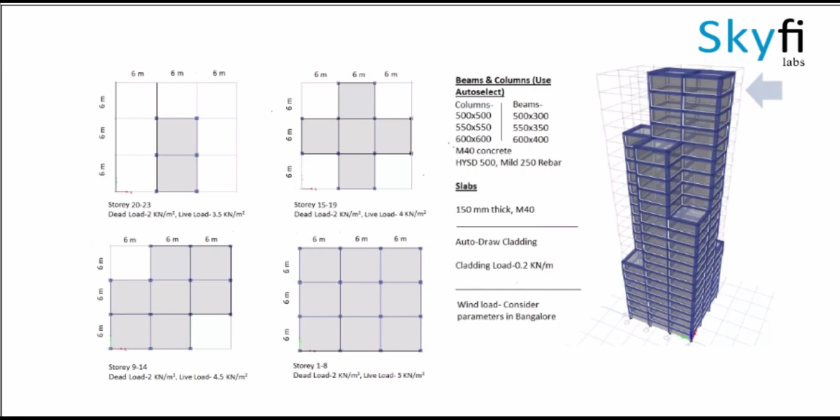By looking at this figure we can see the various beams and columns that have been given, and we have to use the auto select option for both beams and columns of various sections considering M40 concrete, HYSD 500, and mild 250 rebar. The slab is 150 thick, and the various sections and grid lines as shown in the figure have to be constructed.

Now go to Define and add materials, and define the materials M40, mild steel 250, and HYSD 500 by adding new materials.

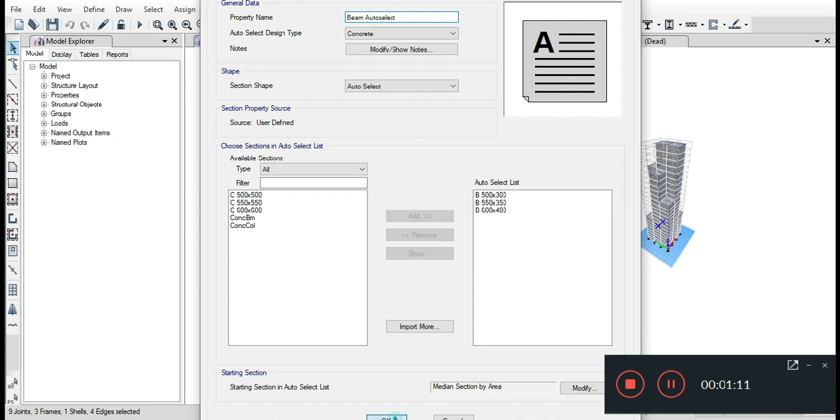Again go to Define, Section Properties, and add beams and columns by adding a new property and selecting the given dimensions in the questions. I have already added them, and we have to select an auto select list as shown in this property. The property list can be added by selecting Add Property and then Add Property List. Similarly, columns should also be considered.

Now again go to Section Properties and add a slab of 150 thick. Using the draw option, carefully draw beams and columns. Here I have already drawn them.

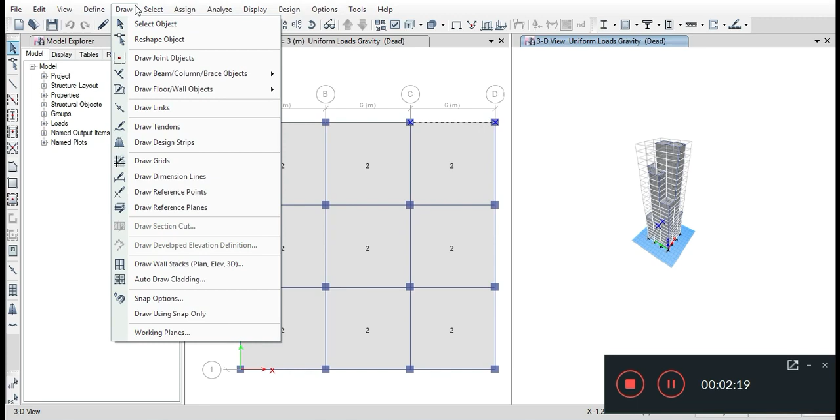After drawing carefully as per the given questions, loads have to be assigned. On slabs, a uniform load of dead load and live load has to be given as per the given question, and on cladding, 0.2 kN per meter is given on the beams.

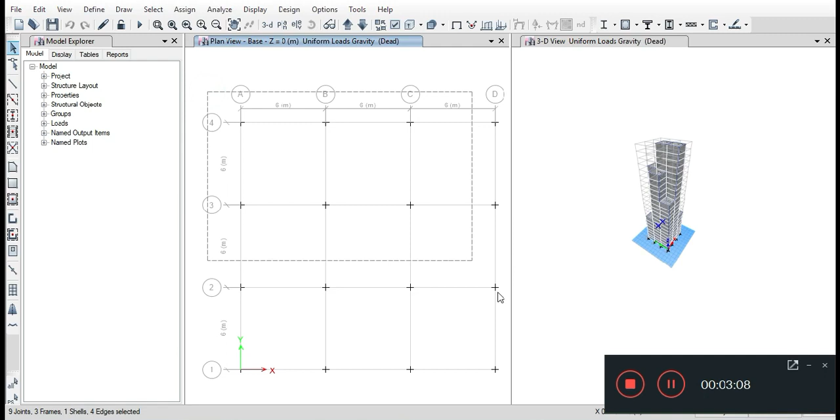Now go to the ground floor as shown in the figure, where Z is equal to 0 meters, and select all the joints. Go to Assign and Joints, and keep it as fixed.

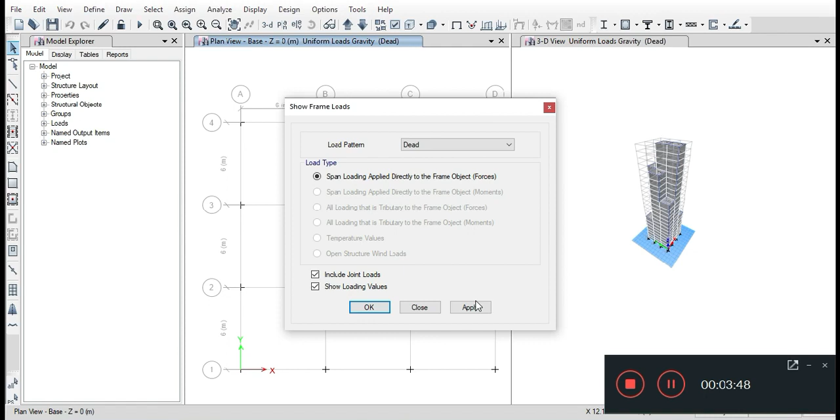Now we will view all the loads acting on the structure. First we are looking at the cladding load, and then we will look at the dead load and live load acting on the slabs.

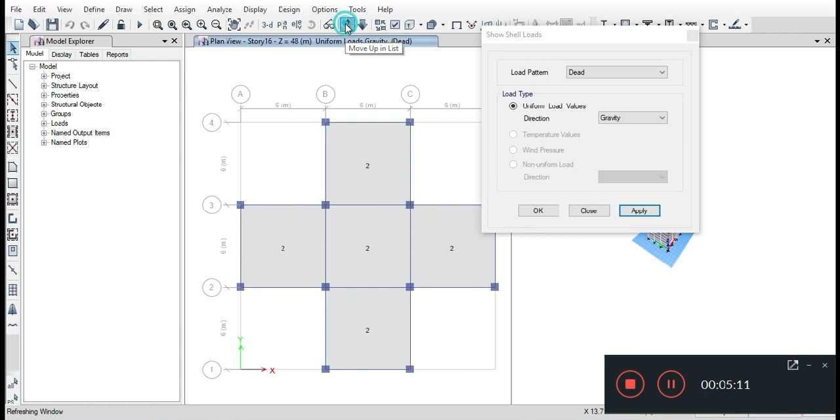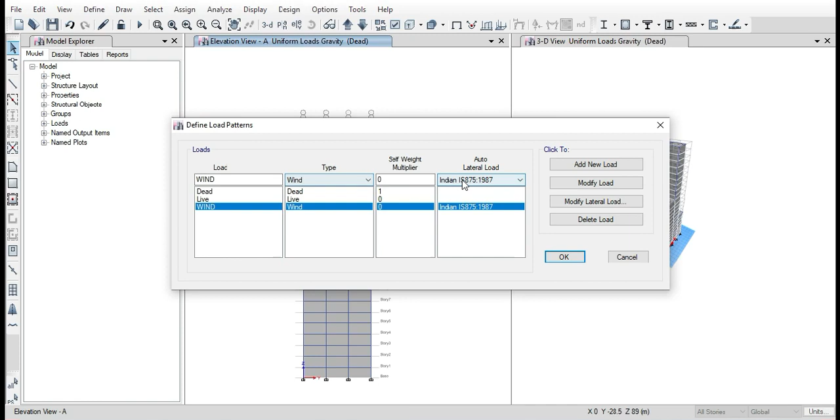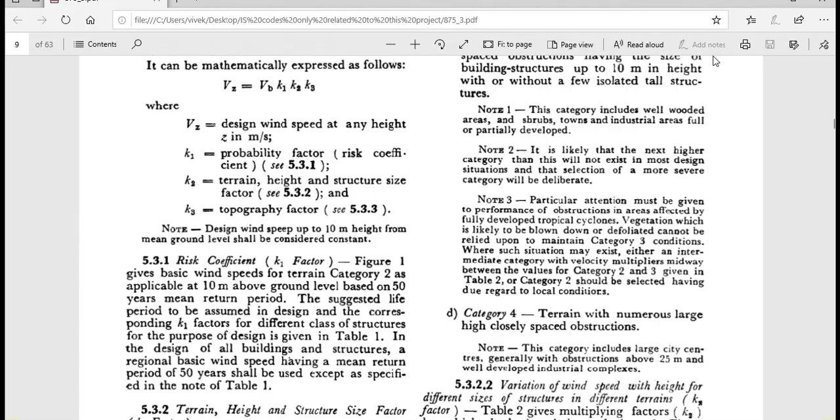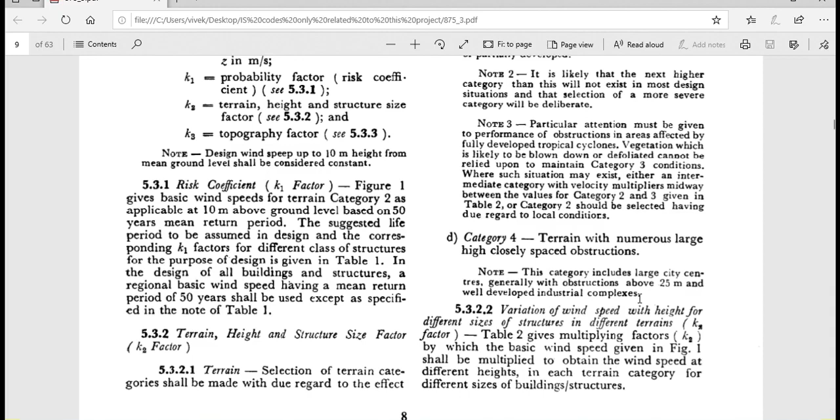To assign wind load, go to Define and Load Patterns, and there we have to use the IS code to determine the various parameters. The first is the velocity, the wind speed. In Bangalore, from the map we can see that it is 33. The next parameter is terrain category, and from the code we can see that it belongs to category 3.

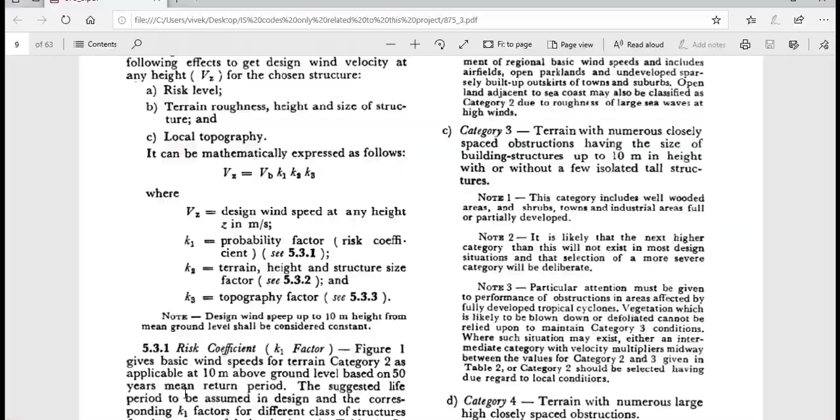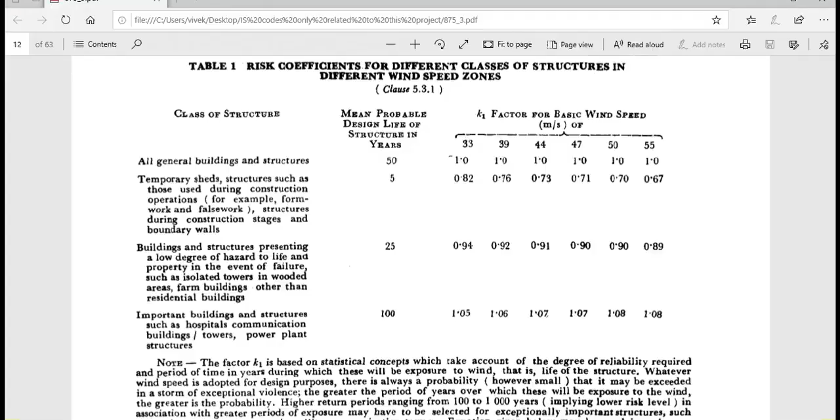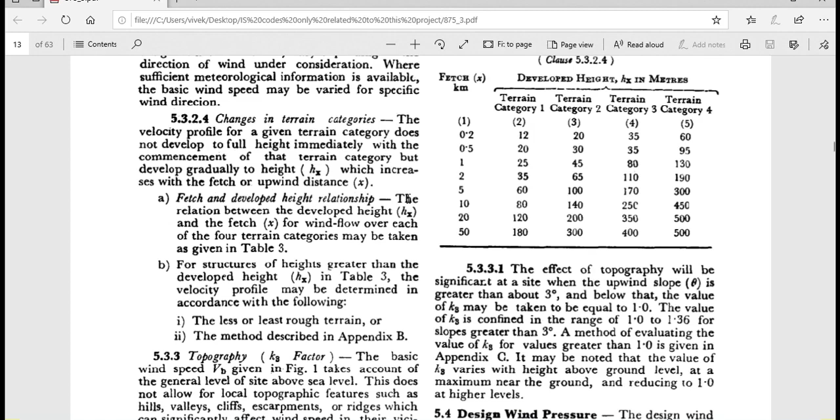For the class, again by looking at the IS code we can see that the structure belongs to class B, as it is between 20 to 50 meters in height. The coefficient is 1, and the K3 factor is also 1 because the upwind slope angle is 3 degrees.

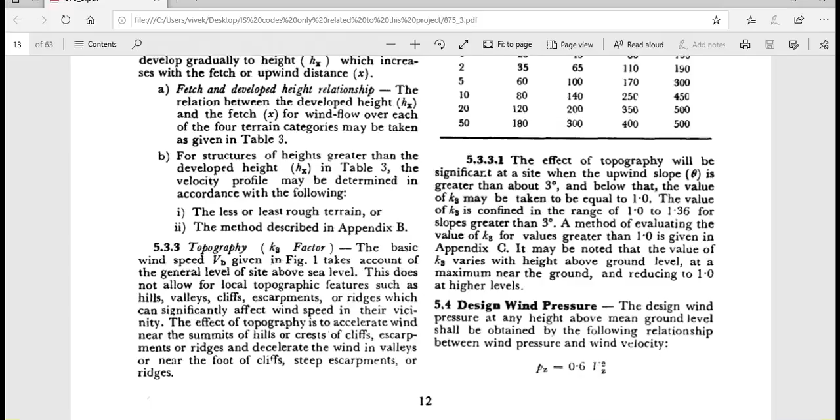Wind load has to be assigned by going into the elevation and assigning the shell loads as given by the IS code. This can be viewed in the video.

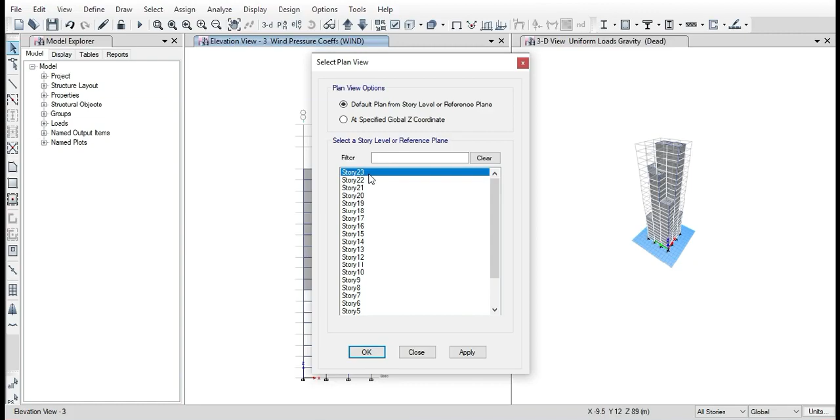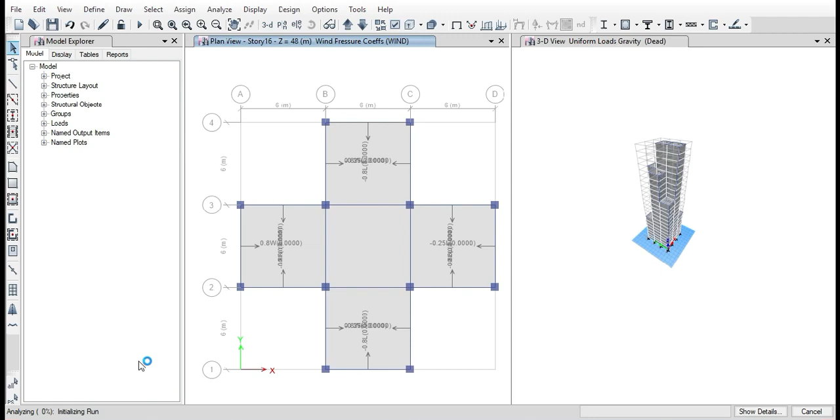Now we are in the final stage of the video, that is to analyze the model and design it. For analyzing the model, click on Analyze and Run. It will take a long time as the number of floors is high, so I have fast forwarded the video.

We can view the deformed shape of the structure, and also view the bending moment and shear force of the structure.

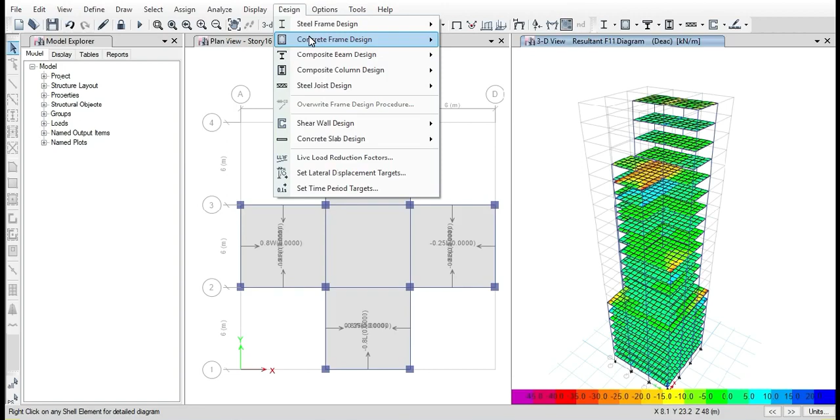For designing, go to the Design tab, Concrete Frame Design, and click on Start Design Check.

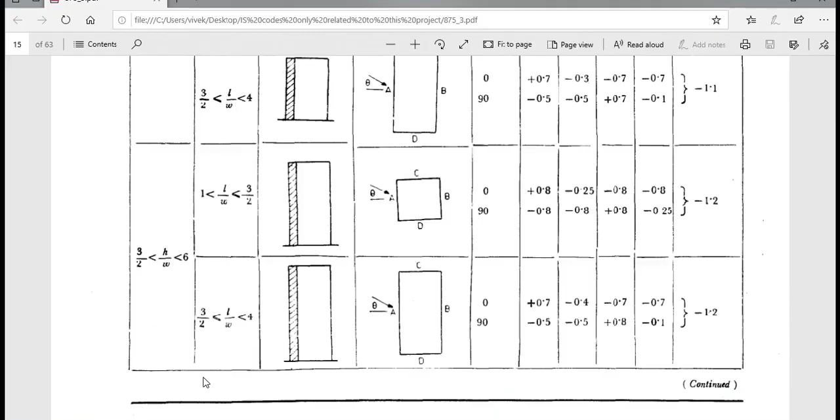After checking the design, it will prompt a message. After clicking on yes, it will reiterate and redesign on its own. Again it may prompt with the failed members and try to reiterate the structure.

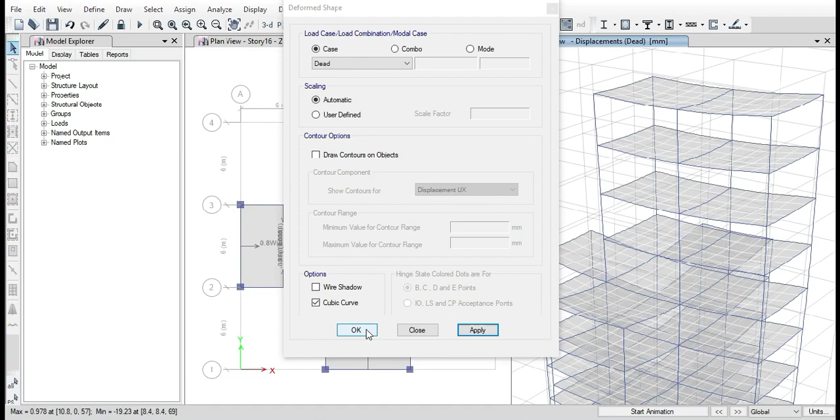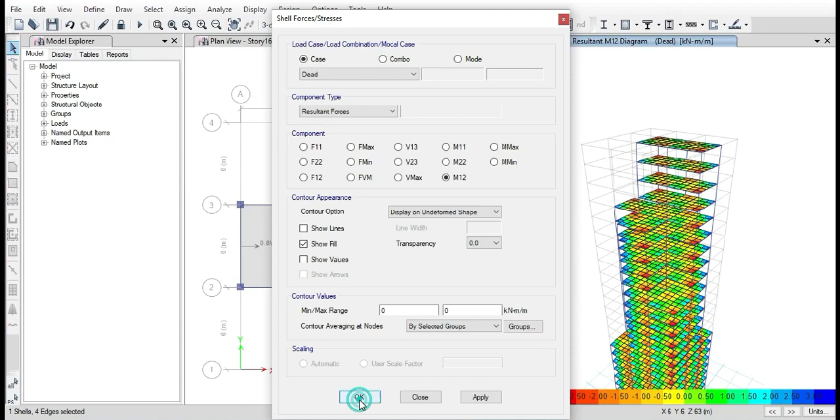Now the design is complete. To check whether all the members have passed, go to Design, Concrete Frame Design, and click on Verify All Members. Now it has prompted that all the members have passed, so the design is completed.